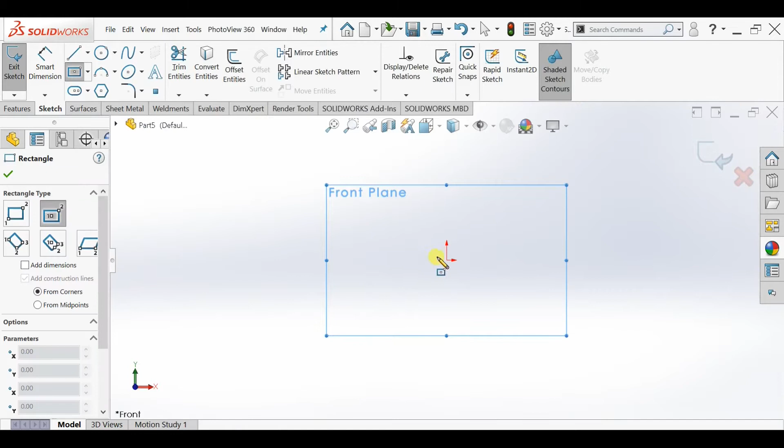Watch the video till the end. Firstly, select New, then select a new part. Select the front plane, click on sketch, and draw a center rectangle. Make sure that you are on center rectangle, and draw it of roughly this size.

Select the smart dimension. Give the length of the rectangle as 200 mm and the height as 50 mm. Select OK, then select the fillet command. Make sure that you are on the 10 mm fillet and select all four corners.

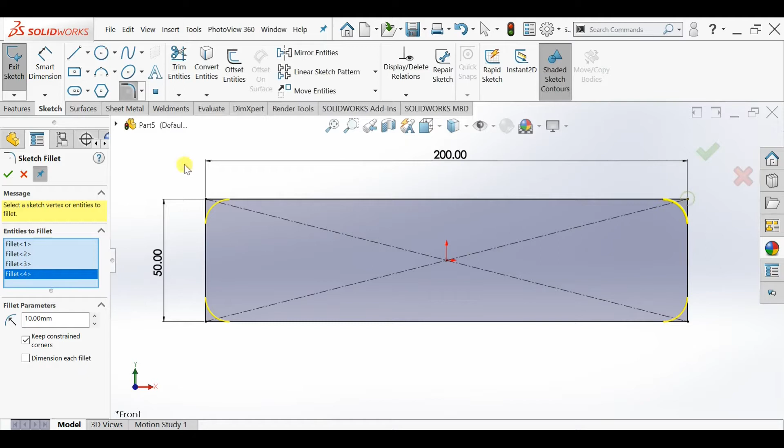Now click on 3-point arc, select the point from the left, drag the cursor to the right and select the point on the right, then pull it not more than 4-5 mm to the bottom side. Press escape, select a center line, and draw a center line coincident with the midpoint, crossing all across the edge of the sketches.

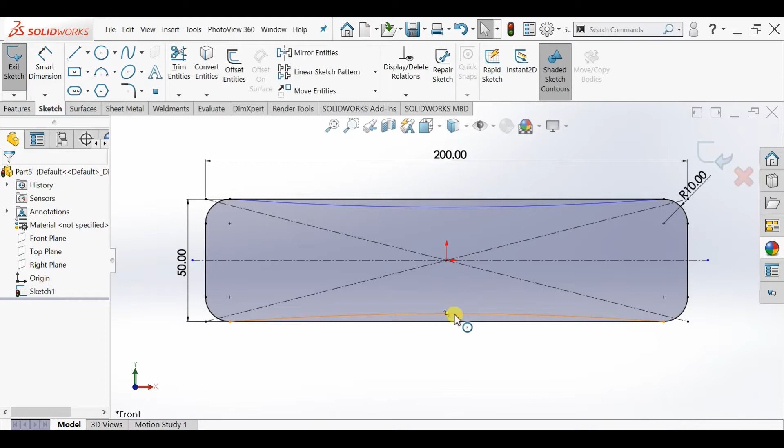Now select the arc and the center line by pressing Ctrl, and click on mirror entities. You might have seen the arc has now appeared here. Now select trim entities and cut these two lines. Press OK, then exit the sketch. This is the front face of the speaker.

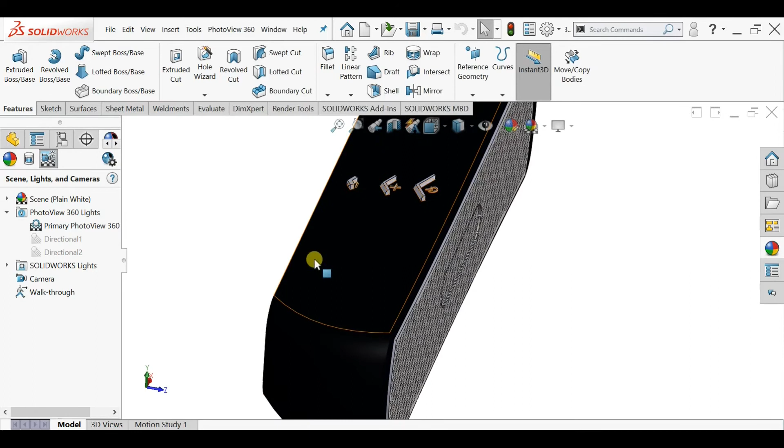Now we will make the back side and join these two profiles using the lofted boss base command. To make a new plane, click on the front plane, go on the plane until you get an anchor symbol, then press Ctrl, click on the plane, and drag it back. Give the distance as 50 mm and click OK.

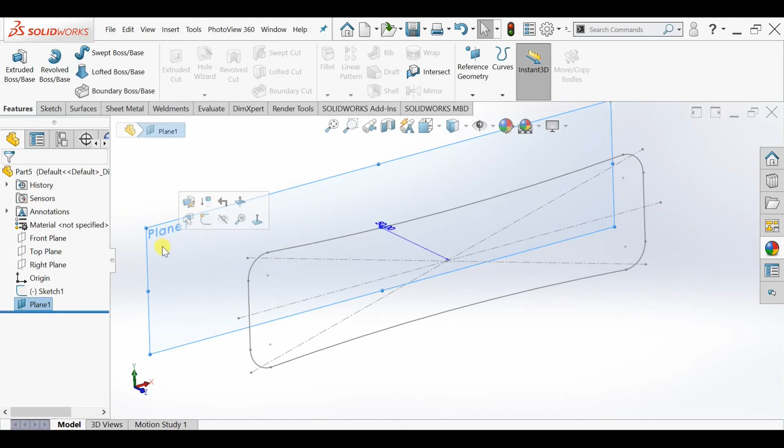Now click on the plane and select the sketch option. Go normal to the plane. Draw a center rectangle, but make sure that the center point of the center rectangle is coincident with the old profile.

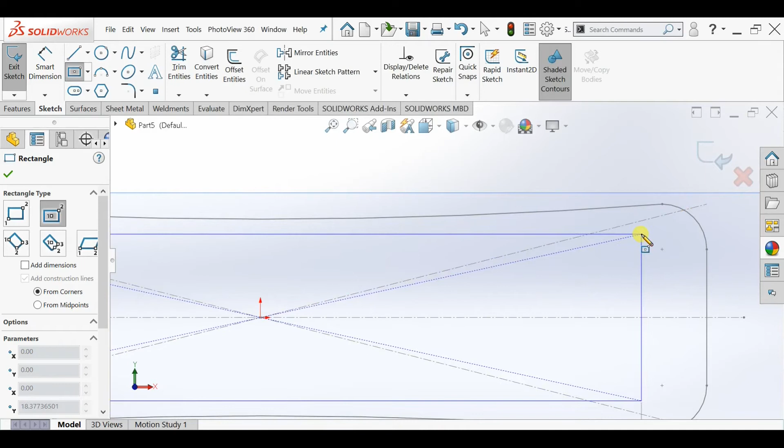Do not make any accidental relations. Draw a rectangle roughly smaller than the existing one. Select OK, then select smart dimension. Give this rectangle a dimension of 180 mm and height of 40 mm.

Now select the fillet tool and select all four corners. This time also the fillet is 10 mm. Press OK and exit the sketch.

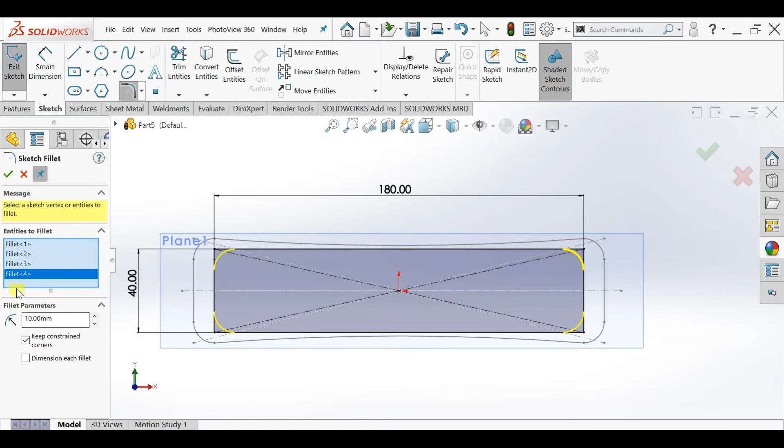Now go to features and click on lofted boss base. Select a profile, then click on the point which is in line to that. This will give you a speaker shape, but the problem is we want these edges to be curved. For that we have to make guide curves.

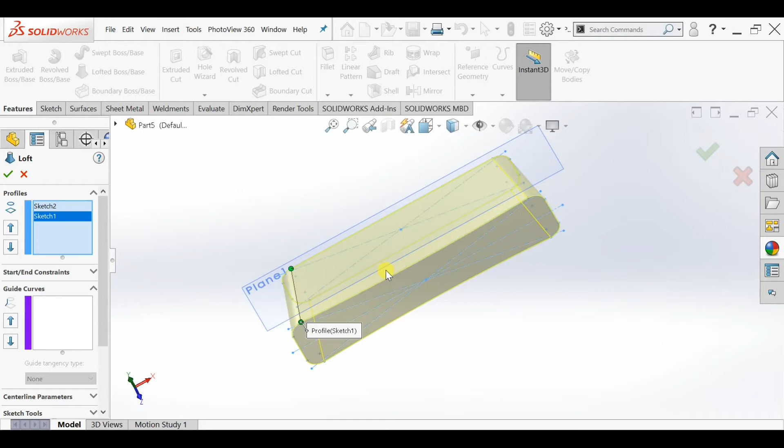So exit the command, click on sketch, then click on 3D sketch. Now select the spline tool, select the midpoint properly, and make it coincident with the front profile's midpoint. Press escape. Now select this spline and click on mirror entities.

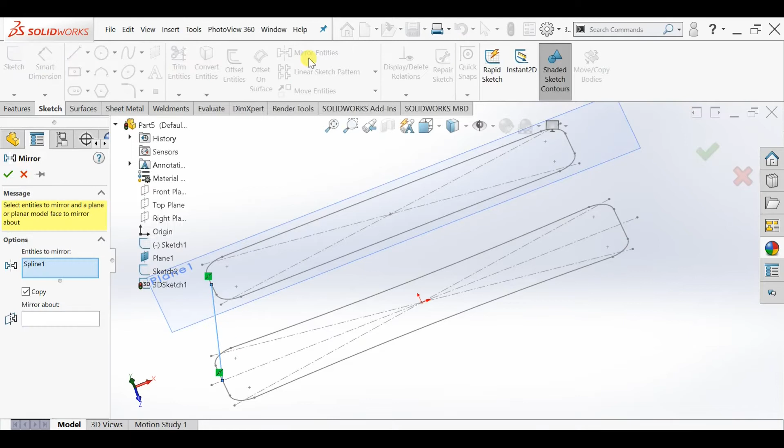In the mirror about tab, click on right plane. You will see that the same line has appeared here. Now press OK, select this spline, and make arrangement which you feel comfortable with. Make sure you don't make any curve too tight or too extended.

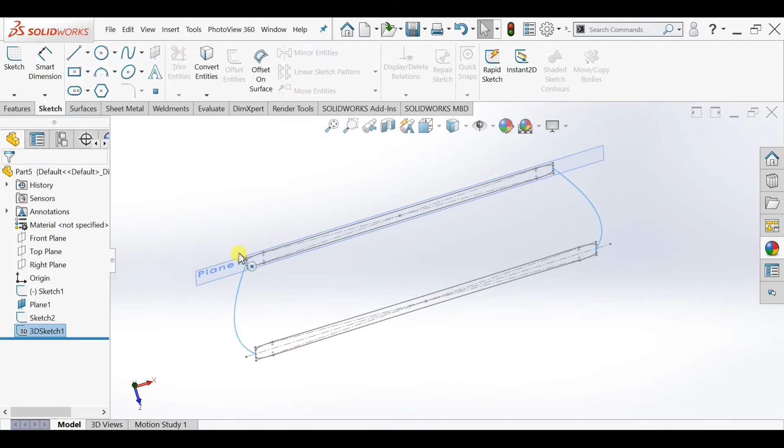Now exit the sketch. Click on features, then click on lofted boss base. Select this point of the profile and this point of this profile. In the guide curve option, select this line as one guide and the second as this one. If you can see, the shape is completely formed.

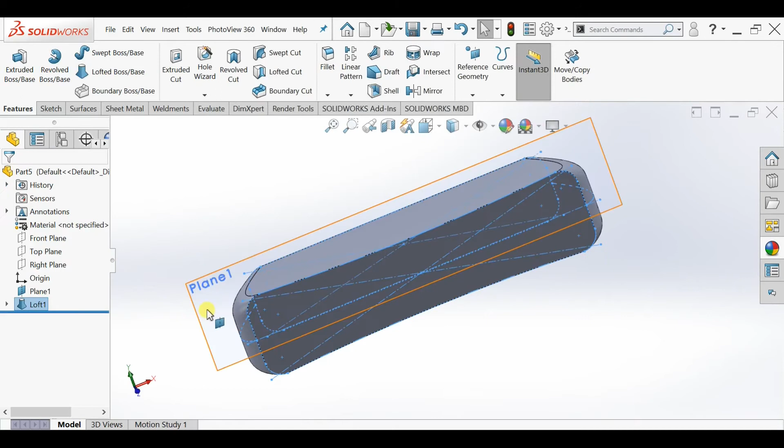Now click OK. You can hide this plane if it is disturbing. Now click on the front plane and click sketch. Go normal to it, and again select a center rectangle, drawing it roughly smaller than the face.

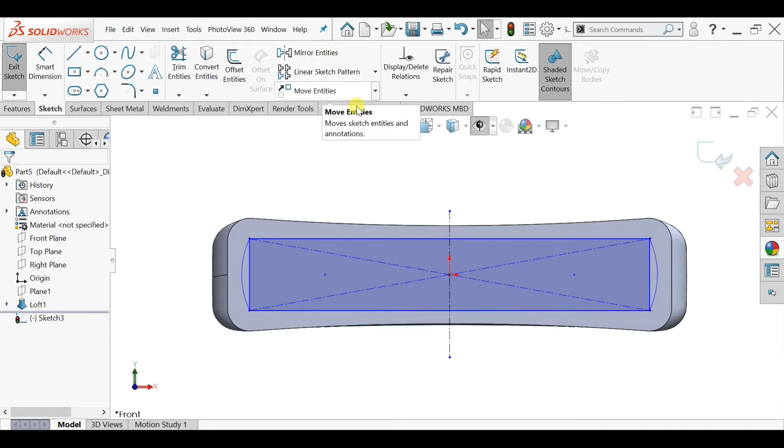Select 3-point arc and draw it roughly of this size. Now select the center line and draw it vertically, crossing the center point of the sketch. Click the arc, press Ctrl, click the midline, then press mirror entities. Now select the trim tool and cut these two lines. Now a profile is formed.

Now go to features, select extrude boss, and extrude it up to 1 mm. Make sure that you have unticked the merge result option. I will tell you the reason as we proceed.

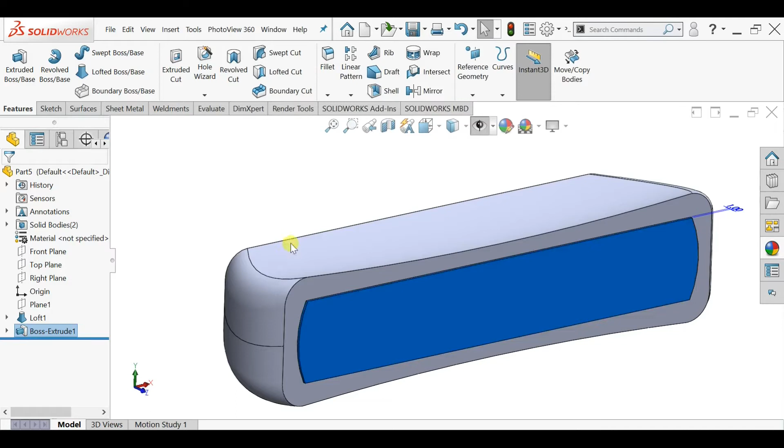Click on OK. Now click on this surface, go to the linear pattern, click on fill pattern, go to the bottom in the command, and click on create seed. Now click on circle, click on 1 mm.

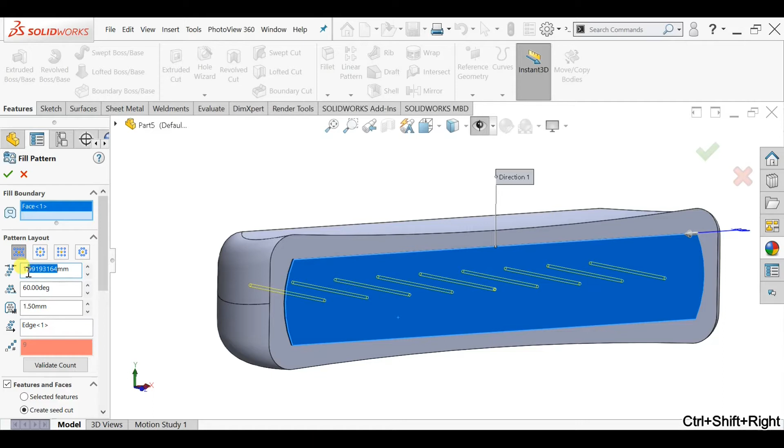Now go to the fill boundary tab and select this boundary to be filled. In the instance spacing tab, give the instance spacing as 1.5 mm and the margin as 1.5 mm.

In the direction tab, it has automatically taken this direction, which is the start direction. You can select any straight line and it will work. Now if you see, there are hundreds and thousands of holes formed on this surface.

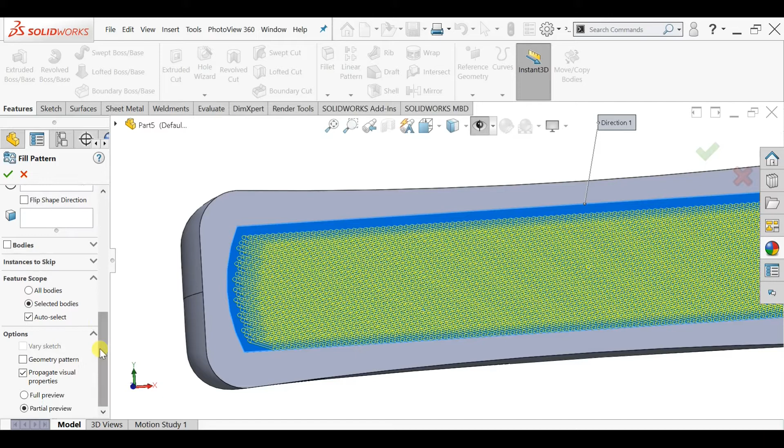The reason why we unticked the merge option when we were doing extrude boss was because if we merge the results, SolidWorks will treat these two as the same body and perform the operations on the complete body, which we don't want. We want only perforations on the surface.

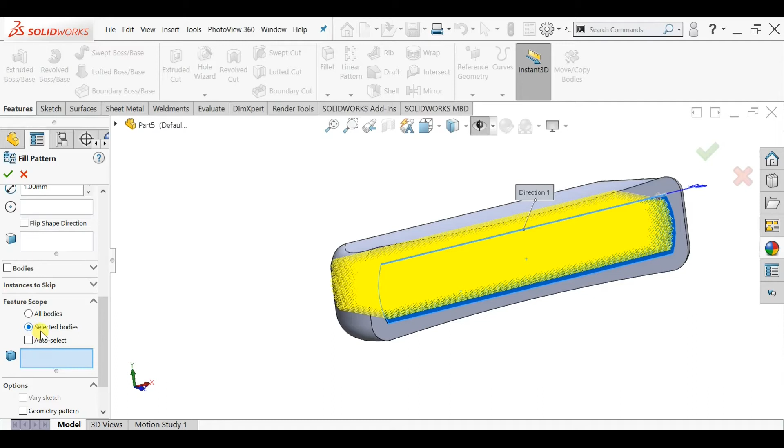Make sure that you have selected the perforations. Untick the auto select and click on selected bodies. Now click this face. Now click OK. Now if you can see, you have got a profile which looks like this.

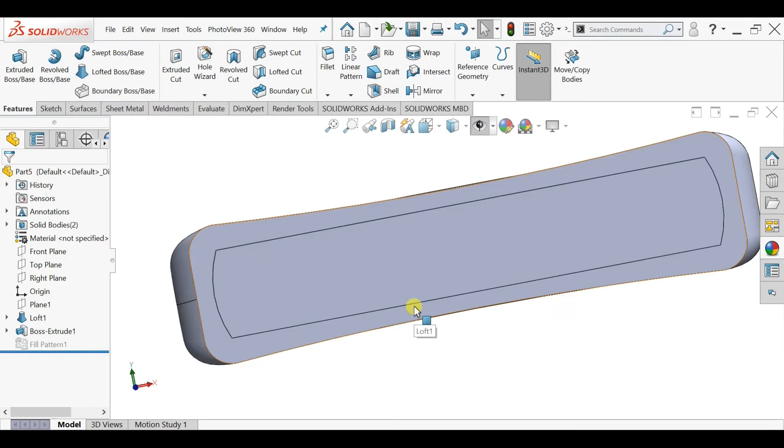This is basically a very heavy operation, so it's always preferred that you suppress this for now. We can anytime unsuppress it and make it visible, but to reduce the processing time you can suppress it.

Now select the top plane, click on sketch, go normal to it. Draw a center line passing exactly from the center of the profile. Select the line tool, draw a shape roughly looking like this.

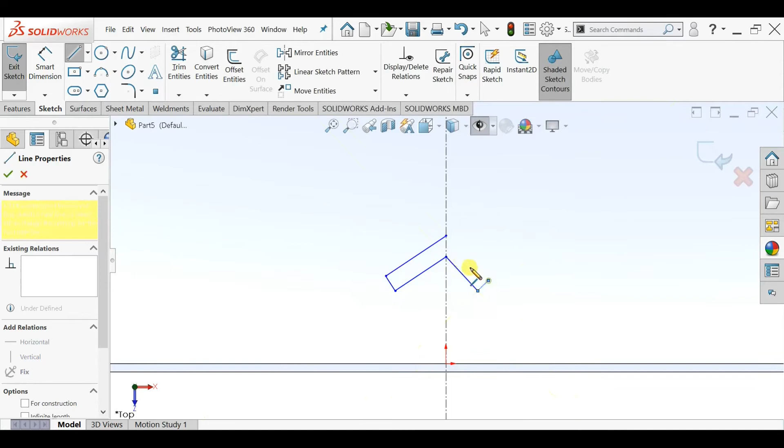Select the smart dimension tool, give the outer degrees as 120 degrees. Again select the smart dimension, give the thickness of these buttons as 1.5 mm. Apply the same for this too.

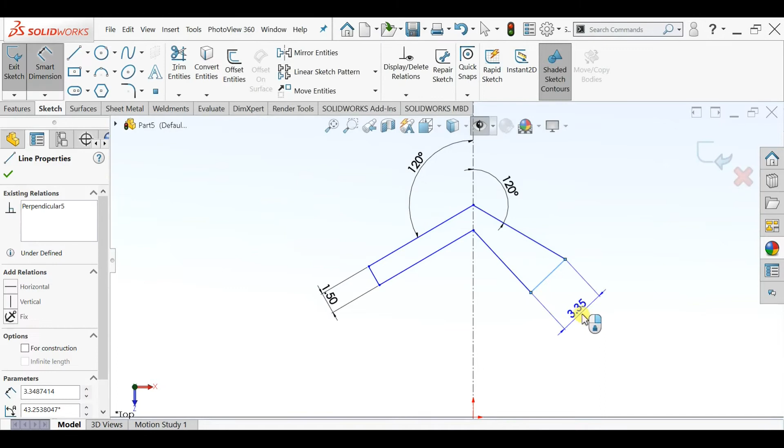Now press escape, select the right hand side, the center line and the left hand side all by pressing Ctrl. Make relation as symmetric. Click OK.

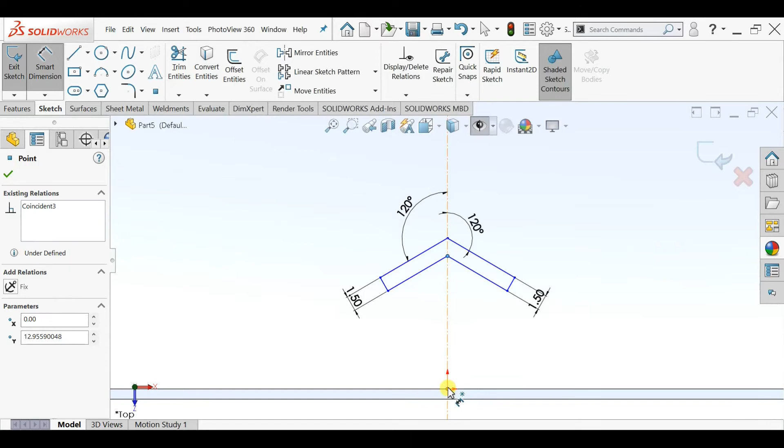Now again select the smart dimension, hold any of this point and the origin point. Keep this distance as 12 mm.

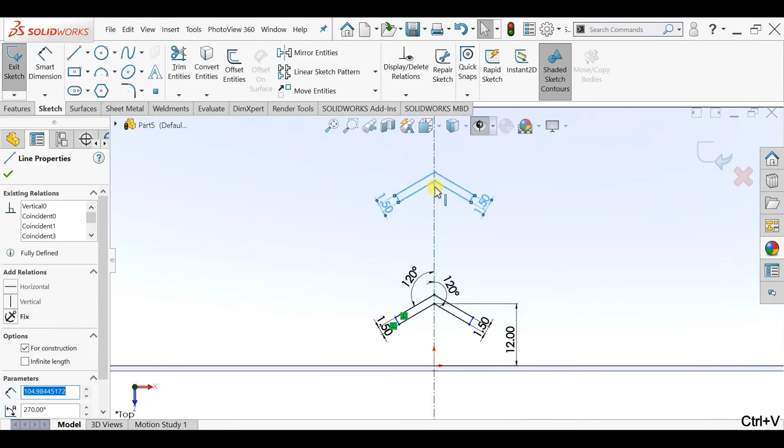Now drag the mouse on this profile. Make sure that all the lines are selected. Copy the profile by pressing Ctrl C. Now click on the center line and click paste or Ctrl V. We want 3 buttons, so we'll paste the same profile one more time.

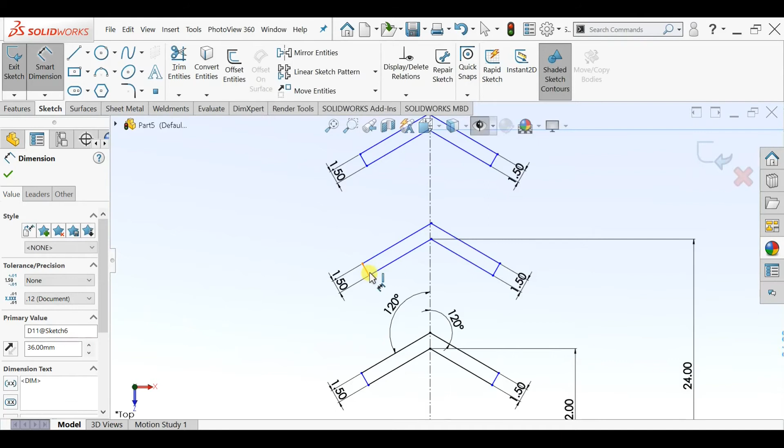Now select smart dimension. Select the second button point and keep it at 24 mm away from the origin. Same with the third button, we'll keep the distance as 36 mm. The length from this point to this point, make it as 10 mm.

Select this line, press Ctrl, select the mid line and select the right hand side line. Now click the relation as symmetric. Click this point and the center line, make as coincident.

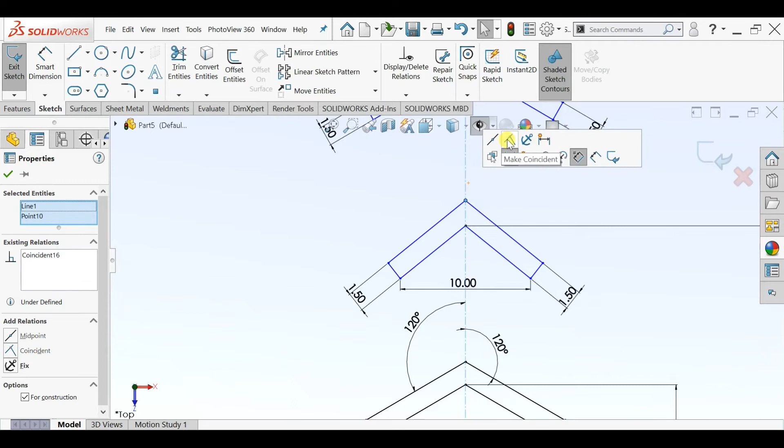Further select the smart dimension, click on the slant line and the mid line and give the dimension as 120. Now the sketch is fully defined.

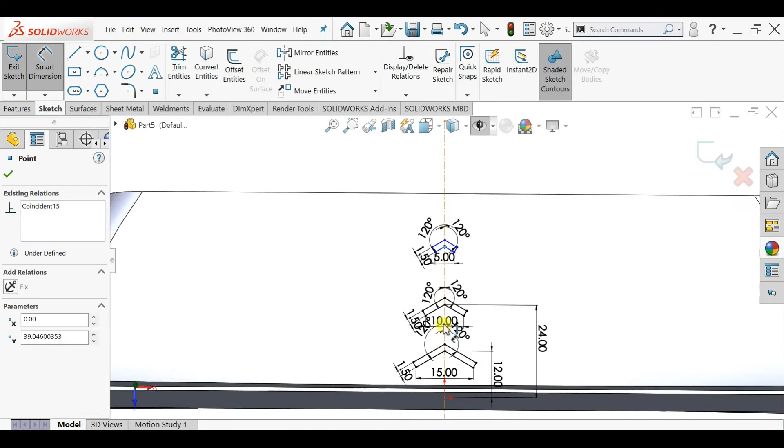Now we will do everything same for the third button, except that we will keep this dimension as 5 mm. The dimension from the bottommost point of the third button and the origin is 36 mm.

Press OK. Now click on features, click on extrude boss base, keep the start condition as from this surface. Now click on this face and drag it up to the height of 3 mm. Now click OK. Now if you can see, we have got 3 buttons here.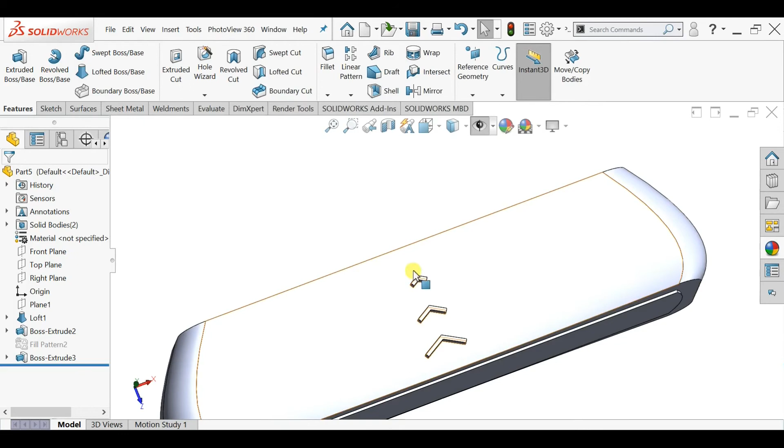Further we will draw the symbols by using the same technique. Now click on top plane, click on sketch, go normal to it. Draw a circle of roughly this size.

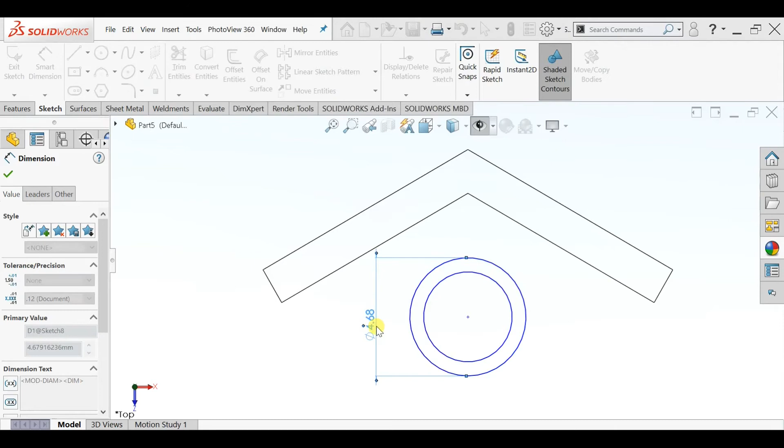Again draw a circle of a smaller length. Now give the dimensions to the outer circle as 4 mm, the inner circle as 3 mm. Now click on the line tool and draw a line roughly at this angle.

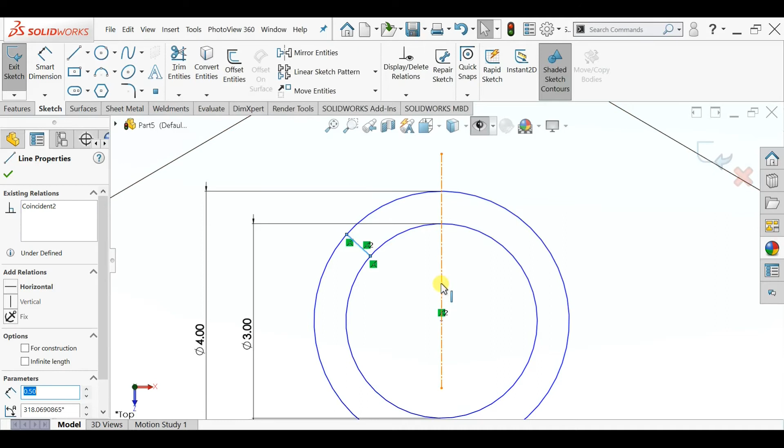Select the center line, make sure that it is crossing at the center. Click on the line which we want to mirror, press Ctrl and click on the center line. Click on mirror entities. You will find the line is now here. Now click on trim entities and delete the lines which we don't want.

Further, select the center rectangle, draw it at roughly of this height. You can adjust the height as per your convenience. Press OK.

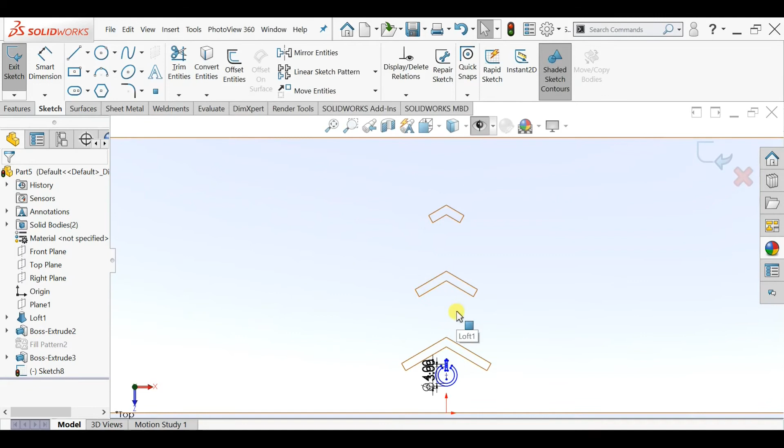After this, we will draw a plus symbol at this button. To do that, we will select the center line and draw a center line crossing all the switches as well as the origin. Make sure that the line has a coincident relationship with this point.

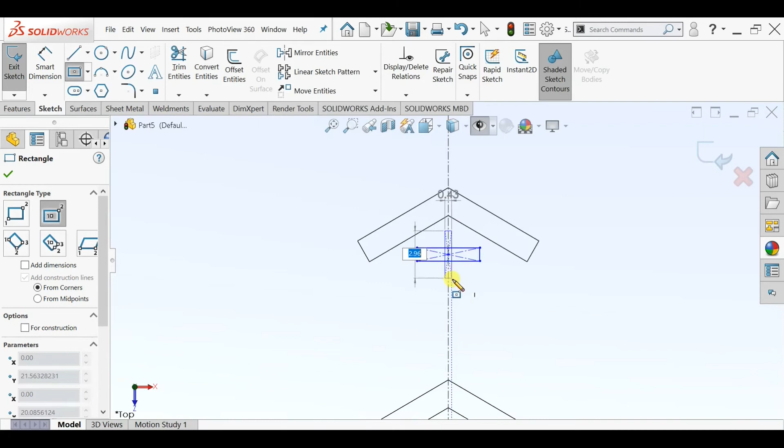We will draw a plus with the symbol of two center rectangles. Select the center rectangle tool, pull it horizontally and click OK. Now draw another center rectangle of roughly this size and click OK. Select smart dimension, give this as 0.5 mm, same to this, and the length as 3 mm. Now trim the entities in between.

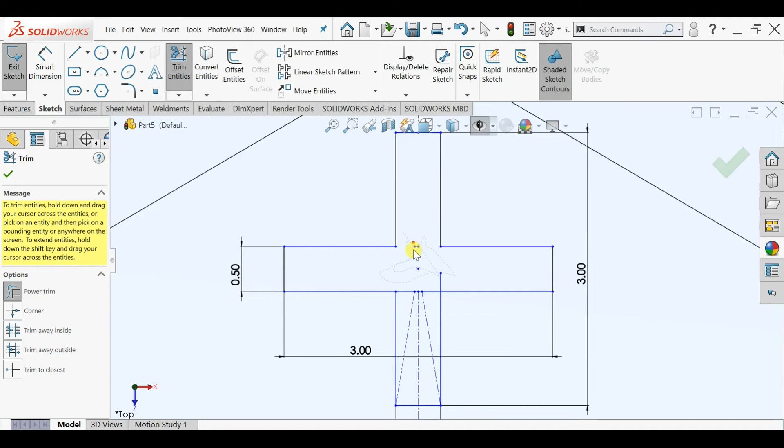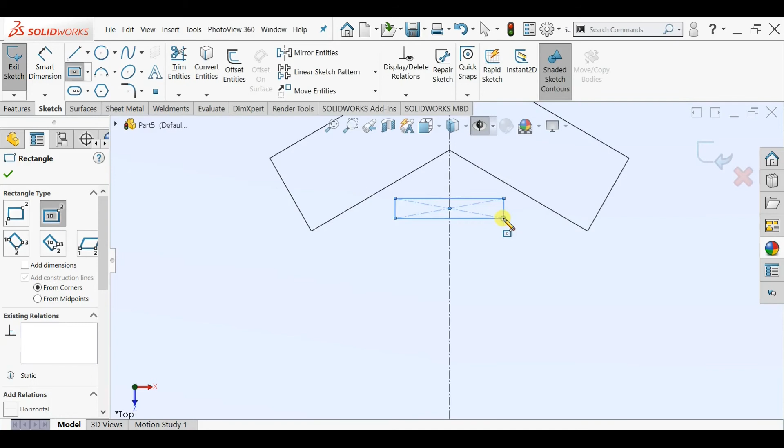Press OK. Now we will draw a simple minus sign by drawing a horizontal center rectangle. Click on the center line and draw a center rectangle of this size. Select smart dimension, give the dimension as 3 mm and thickness as 0.5 mm. You can pull the rectangle to some extent so it does not cross or touch the buttons.

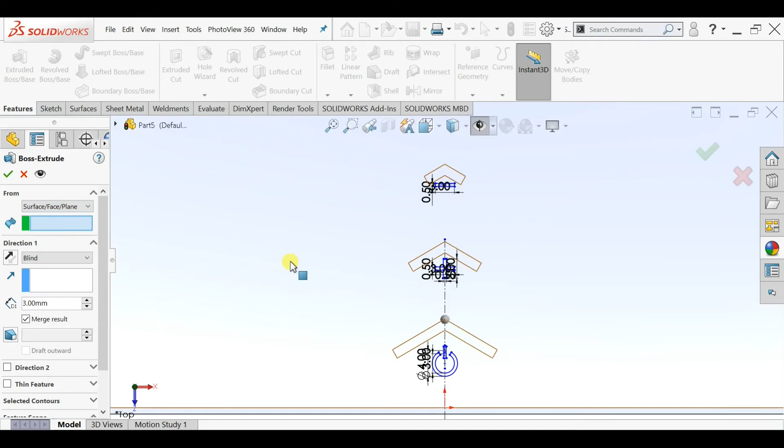Now click on features, click on extrude boss. Select the start condition as surface face. Select this face and pull it up to 3 mm. Press OK. Now if you can see, the switches are now visible.

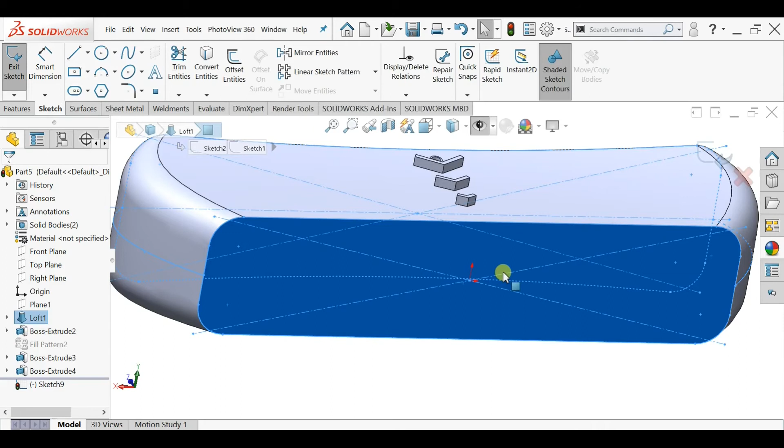Now we will draw a slot where we can insert the USB and the memory card. Select the back face, click on sketch, go normal to it. Draw a center point slot roughly of this size. Give the height as 20 mm and length as 50 mm.

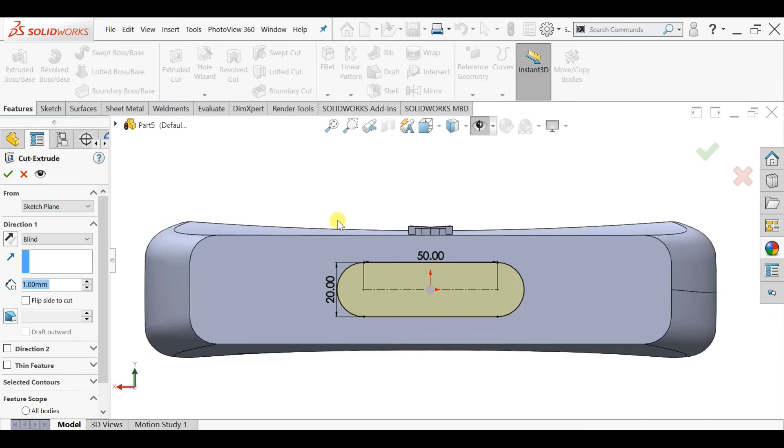Press OK. Click on features, click on extrude cut. Extrude cut it up to 1 mm. Press OK. Now select the internal face and click on sketch, go normal to it.

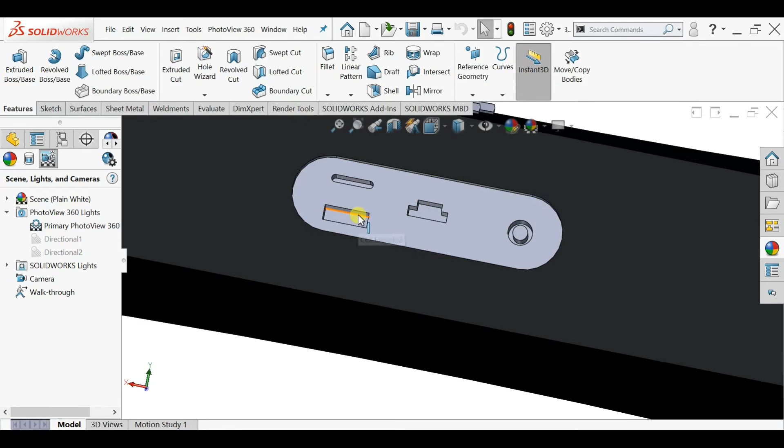Further, we will make a slot, one for memory card, one for USB, and a slot for charging and a 3.5 mm jack. We can draw the charging slot using two rectangles, this one by a center slot, this as a center point rectangle, and this as two circles. You can shift between the tabs by pressing Alt Tab.

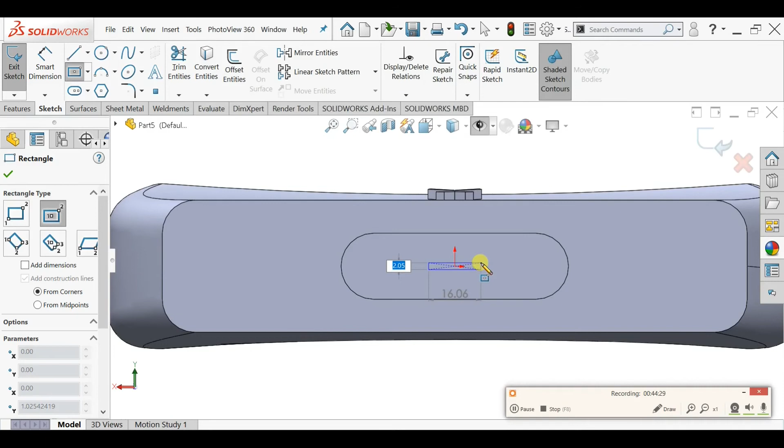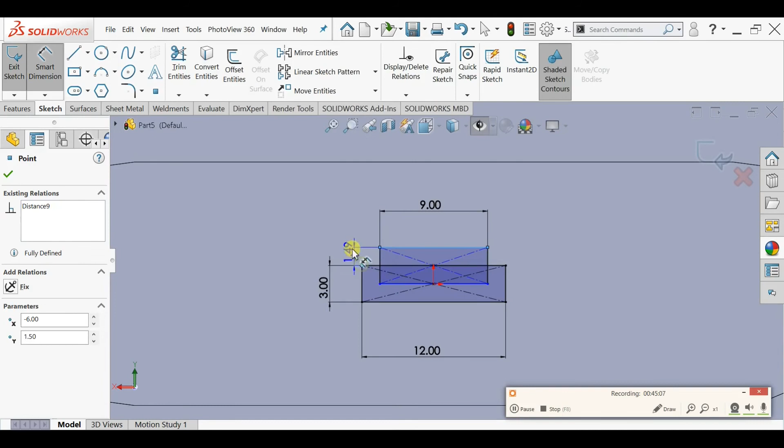Now click on this face, select the center rectangle, draw a center rectangle coincident to the origin. Draw another center rectangle roughly smaller than the previous one. Select smart dimension, give the dimension as 12 mm and 9 mm. Set the height of this rectangle as 3 mm and the height from this point to this point as 1.5 mm.

Select trim entities and trim all the unwanted lines. Click OK. Select the center point slot, draw it roughly of this size. Put the height as 2 and length as 5.

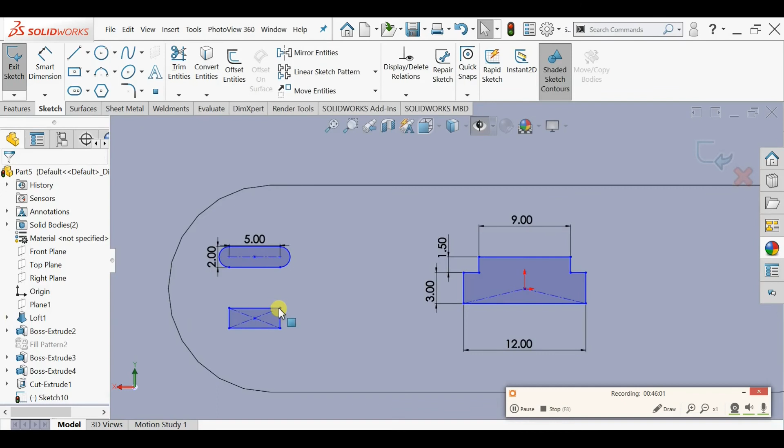To draw the USB simple slot, we will select a center rectangle. In alignment with this midpoint, we will draw a rectangle roughly of this shape. Set its dimension as 5 mm by 2 mm. Press OK.

Click on the midpoints of both and make the relationship vertical, so that if you move one profile, all the profiles will move together.

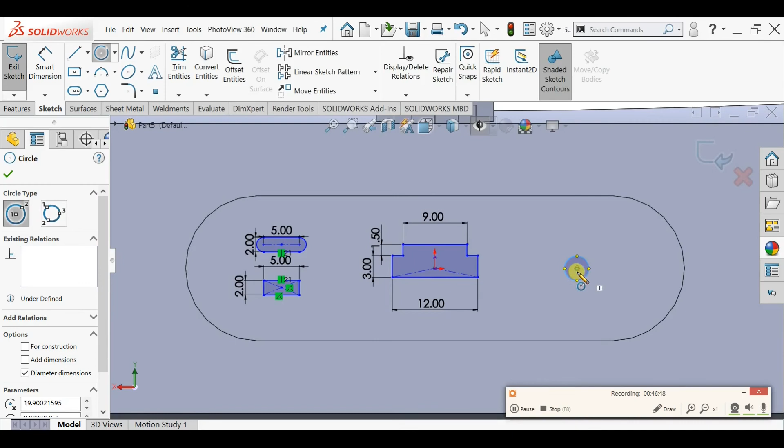Now select the circle, draw a circle at roughly this point. Draw one more circle concentric to the same. Now click on Smart Dimension. Give the dimension to the outer circle as 4 mm and the inner circle as 3.5 mm.

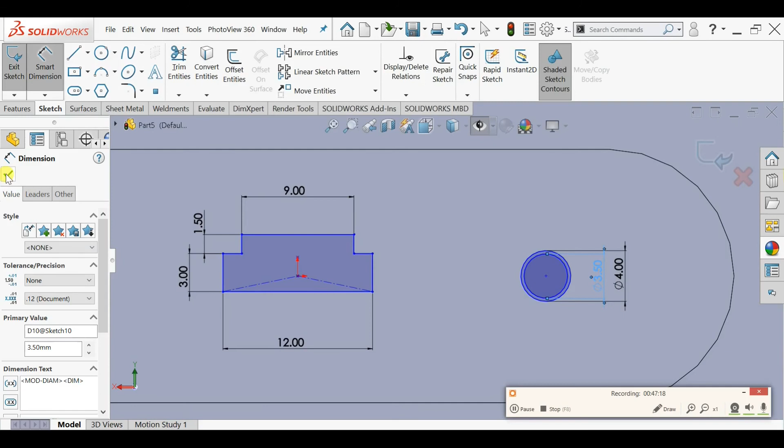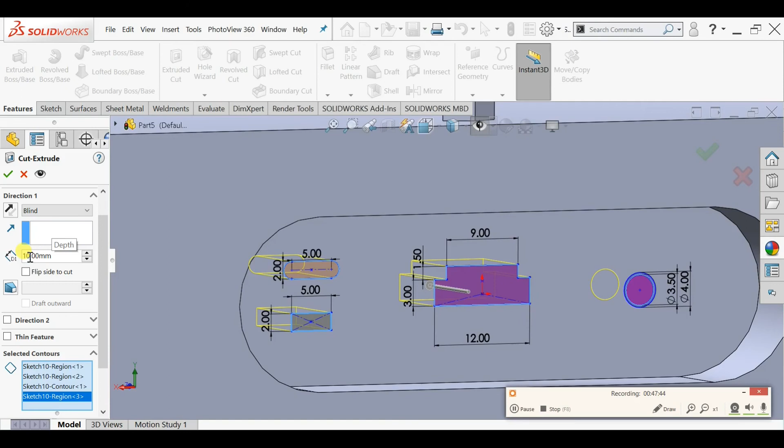Press OK. Now click on Features, click on Extrude Cut. Go bottom in the option. In the selected contour option, click the profiles which we want to cut. Cut all the profiles up to 1 mm. Press OK. Here is our back panel ready.

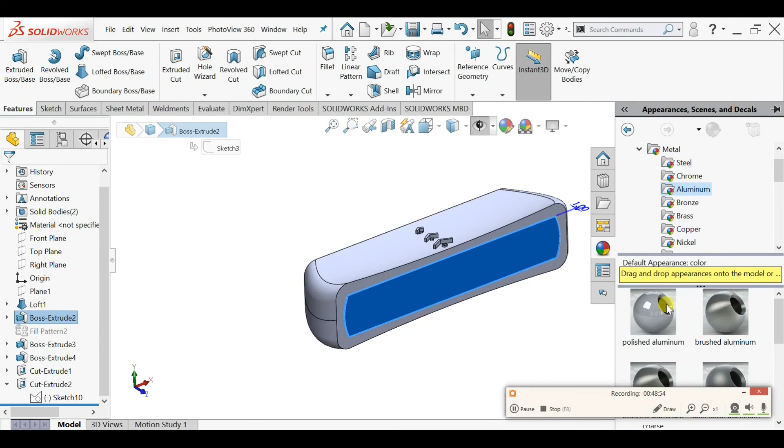Now it's time to give the appearance to the speaker. Firstly, select this face, click on appearance, go to metal, select aluminium, and double click on polished aluminium.

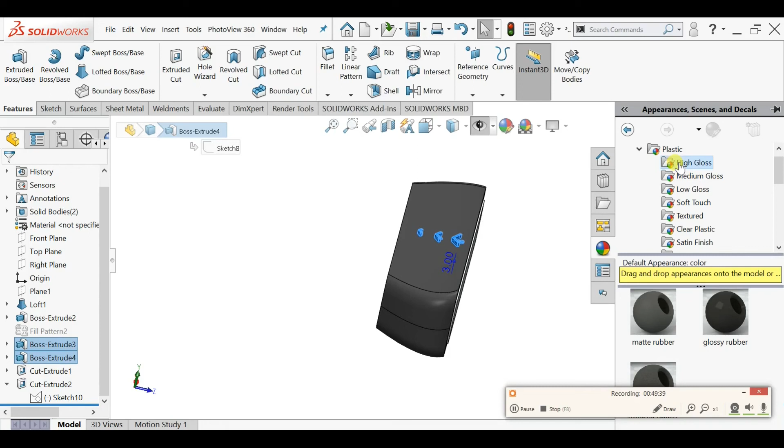Now select the complete loft body, click on appearance, go to rubber, click on gloss rubber and click on glossy rubber. Now to provide the appearance to the switches and the symbols, select both the profiles from the design tree, click on appearance, go to plastic, on high gloss plastic, select white. Now if you can see, the switches are more clearly visible.

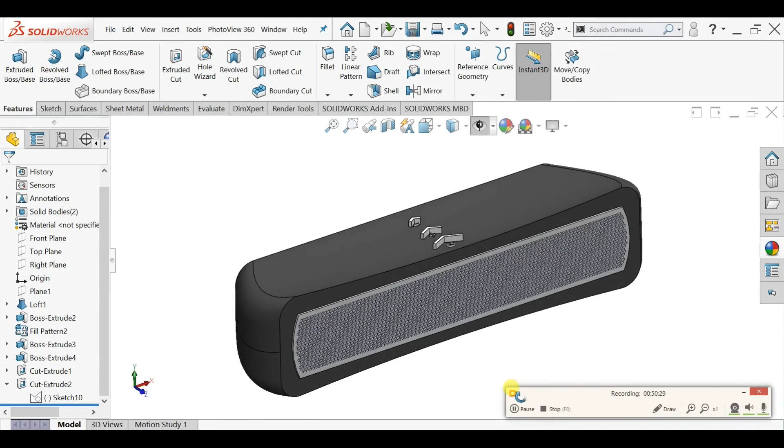At this point of time you can unsuppress the feature and you can see that the net is back. So this is how you can make a simple 3D model of a speaker.